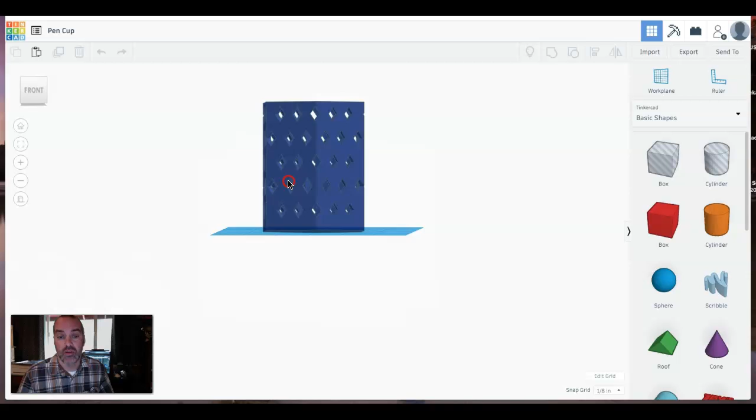You know, the thing that you put on your desk and put your pens in. You can see it on the screen right here, kind of a cool little pen cup. It's an octagon with a bunch of cool diamonds cut out of it, and there's also a solid base so when you pick it up your pens don't all fall apart.

We're designing this thing with the 3D printer in mind, so you can see the wrench from our previous video, all this stuff, in a couple clicks we send it off to the 3D printer. So this will be a cool plastic pen cup when we're all done with it.

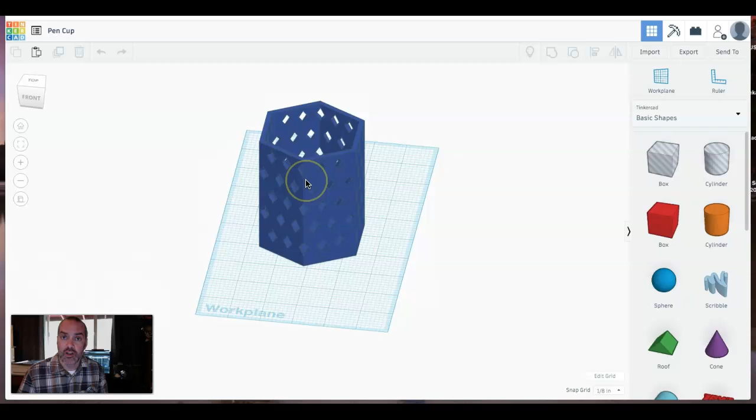To get started, I'm going to open up a fresh file here. You've got a chance to look at our finished product, but it's kind of big, so it'll be better if I just have a fresh file for you. I'm going to click up next to the TinkerCAD logo where it says Recent Designs, or you can also click New Design, and I'll have a fresh work plane all set up for me.

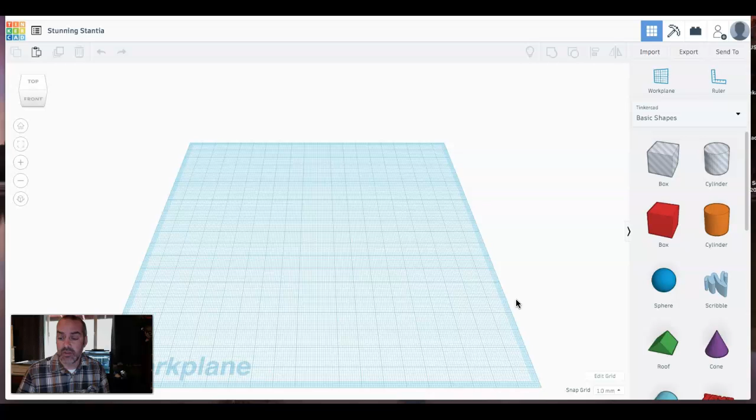Let's do a quick change from our previous work. Instead of working in millimeters, let's switch this over to inches, just a little more comfortable for most of us I assume. Down in the lower right hand corner it says Edit Grid. I'm going to click on that, and you can see I can change my units, going from millimeters to inches.

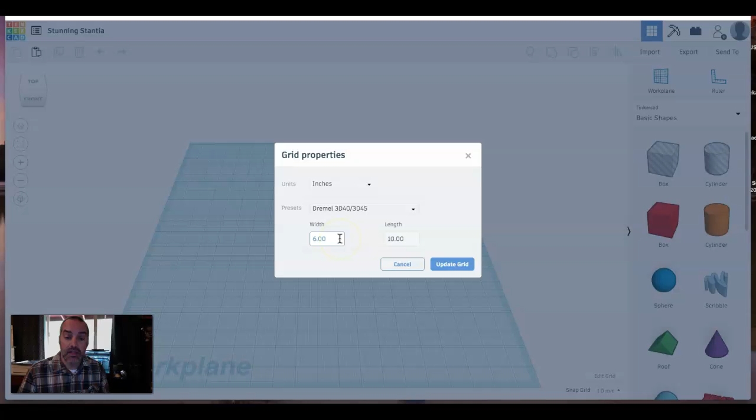Another nice thing to change here is where it says presets, default - this is the size of the work plane. If I click on that, there are a couple options for different 3D printers. The one in the shop is a Dremel 3D45. I'll click on that, and it automatically makes the length and width 6 inches and 10 inches. When I say update grid, you can see our work plane has changed to more of a long rectangle. This is the build space for the Dremel 3D printer we have, so it kind of keeps you within the bounds of what you can pull off with the machine. If you're doing stuff that's bigger than this work plane, well, you can't 3D print it.

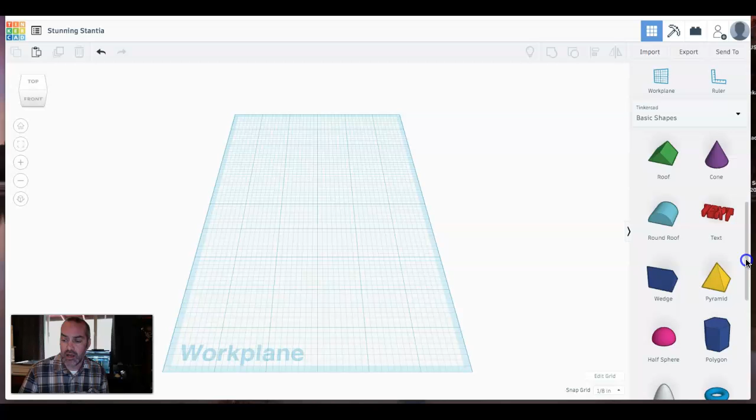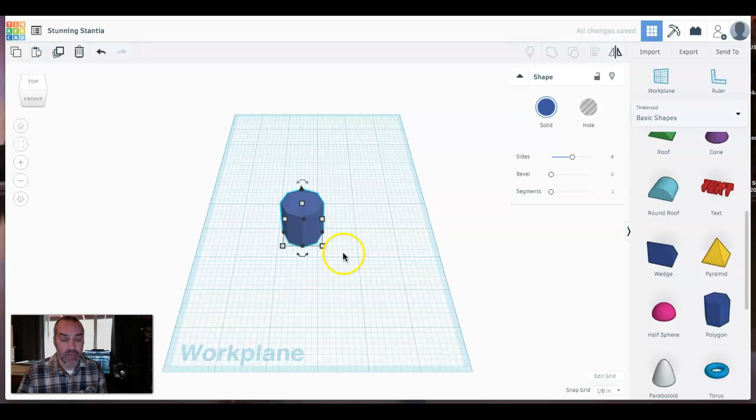To get started on our pen cup, we're going to bring in a couple of basic shapes. I'll come over to the basic shape pull-down menu and find a polygon, click on it, and bring it in. Now you can play around with exactly what size and shape you use for this. I'm going to start off with a polygon, and instead of 6 sides, I'll come over to the slider and crank it up to 8 sides, so it's now an octagon. As I orbit around, you can see I've got a little 8-sided polygon shape here.

I think it's probably about 1 inch by 1 inch by 1 inch. I need it to be a lot bigger than that to hold my pens. I love doing this type of stuff with a tape measure in hand, and I'll grab a pencil or pen and just see how big a full-size pencil is going to be. This one's reading 7.5 inches right now, so I need to make sure my cup can hold something that large. I also don't want it to be too big on my desk, so I love having a tape measure handy just to visually see how big these things are going to be.

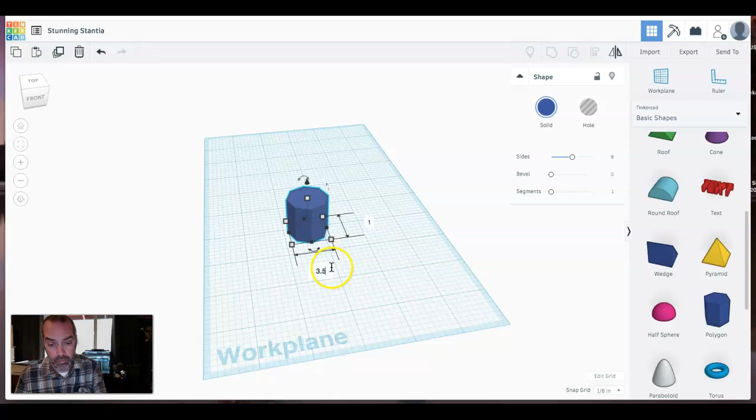I've done some thinking on it, and I think I want this thing to be 3.5 inches in diameter and 4 inches high. To change those numbers, I'm going to click on the little gray square there, and when I click on it, it turns red, and these number fields stay open for me to type in some numbers. I'm going to do 3.5, then click on the other one and do 3.5 as well. So now I have a 3.5 by 3.5 octagon.

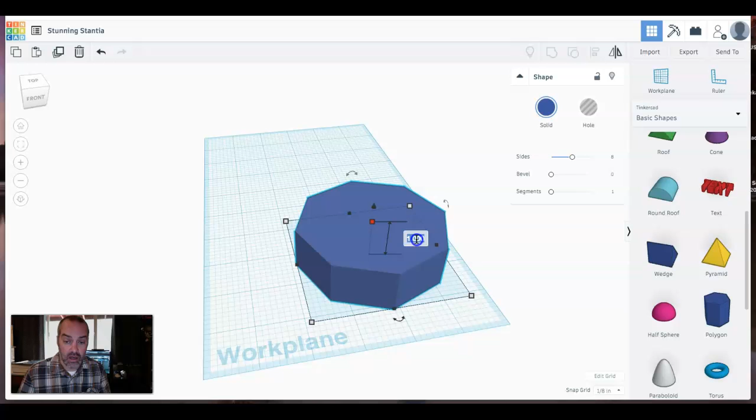Then, to make it a little bit taller, I'm going to click on that gray handlebar that's kind of coming up from the top of my shape. It's 1 inch right now, and I'm going to change that to 4 inches. So I have a good size octagon that's going to be the outside of my pen cup.

Next step, I need to make another shape just like this, but just a little bit smaller, and that one is going to be the hole.

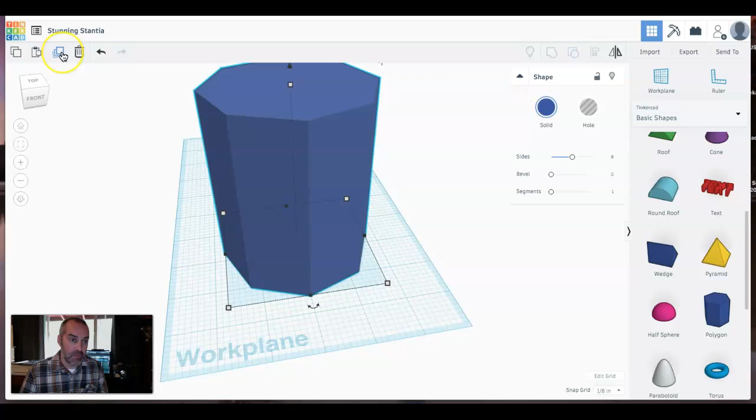It's going to be the part that cuts out the inside of this shape, so it turns it into a cup. To do that, I'm going to use the duplicate command, so you can copy stuff. A lot of what we'll be doing today is duplicating. When I click this button, it has made a second object. I can't see it right now because it's right on top of the first object, but I know it's there.

I'm going to take this second object and drag it up just a little bit, and as far as I drag that up, that will be the bottom of my cup. So I'm going to grab, not the little gray handlebar this time, that's going to actually change the shape of the object. I want to grab the little black cone that's up above it, so I won't change the shape at all, I'll just be dragging that second shape straight up.

So I'm going to click on that, and as I start pulling it up, you can see there's a few numbers popping up here. This is how high I've pulled it up. This is also going to be how thick the floor of my pen cup is going to be, the base of that pen cup. Right now it's at 1/4 of an inch. I think I'll bring that up, let's go for 3/8 of an inch.

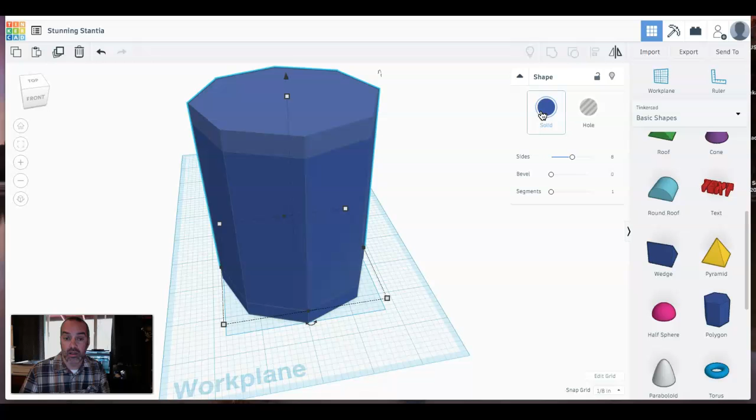You can see now it's a little bit easier to see that there's two shapes here. Just to make it even easier to see, I'm going to come over to where it says solid, and there's a blue color right now, and I'll just change that color so we can see it pretty easy. I'll just change it to red. So you can see I have this red shape inside of the blue shape, but I need to make this red one just a little bit smaller because I need to leave a wall for my pen cup.

So I'm going to click on the red, make sure I got that one selected, and then when I come down and click on the gray handlebar there, I get the two numbers for the length and the width. It was originally 3.5 and 3.5. I think I'm just going to change that to 3 and 3. Alright, so now you can see that I have a slightly smaller red shape inside of this blue shape.

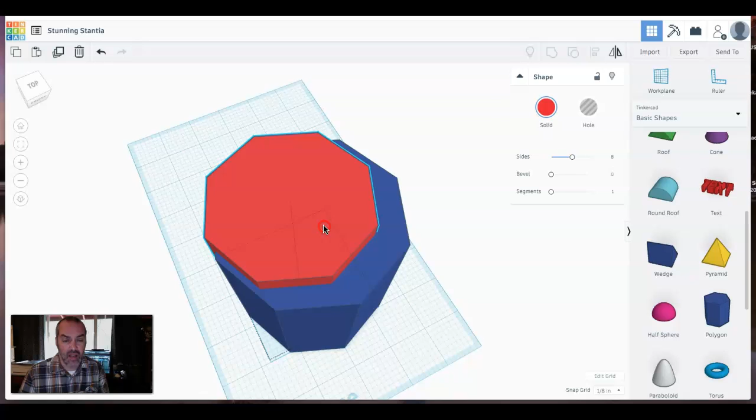But if I orbit around, you can tell they're not lining up properly at all. So I'm going to use the Align tool. I have the red one selected, I can tell there's kind of a little blue aura around it, and I'm going to hold down Shift and click on the blue shape. So now I have the red and the blue shape selected.

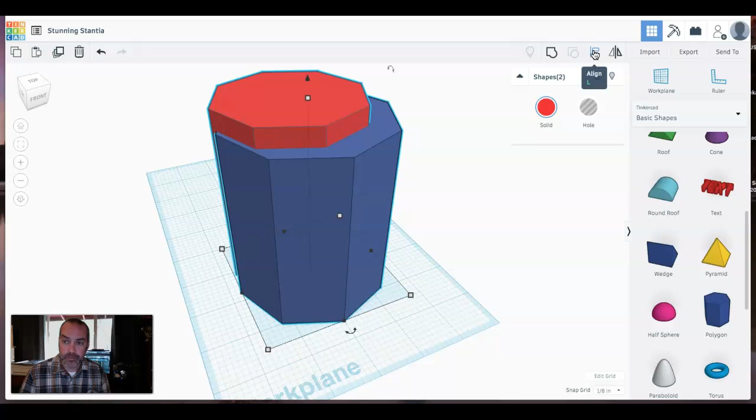And when I come up to the Align command and click on that, I get those little black handlebars. When I click on one of them, it'll align it on the x-axis, and when I click on the other one, it'll align it on the y-axis. I don't want to do that on the z-axis, I've already got those positioned just the way I want them. But the x and the y are now good, and as I orbit around, you can see it is perfectly in the center.

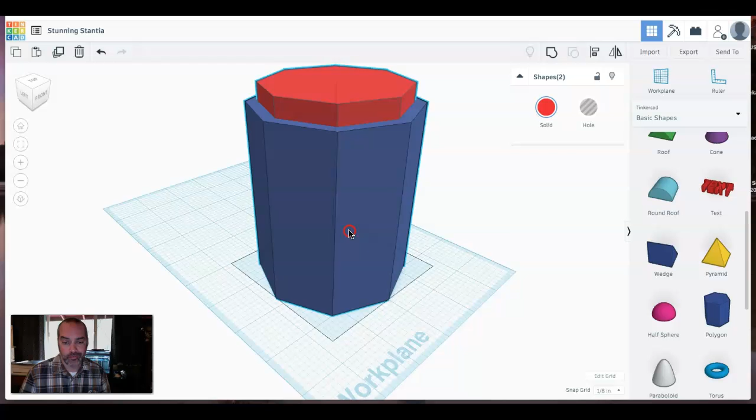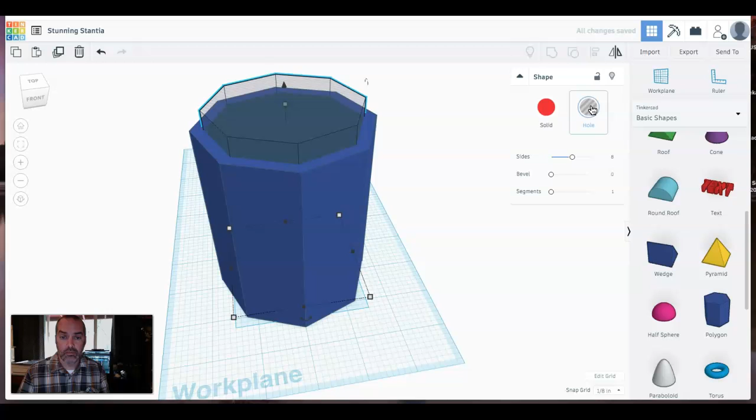Alright, time to make my cup. I'm going to make sure I have them both selected. I can tell I do because there's that little blue outline on all the shapes. Oh wait, I got to change the red one into a hole first. So let me click off, so nothing was selected. Now I click on the red one, and I'm going to change that into a hole. Now when I have them both selected, by holding down Shift and clicking on them both, and when I group them, I've now cut out a big hole in my shape, and I have my cup.

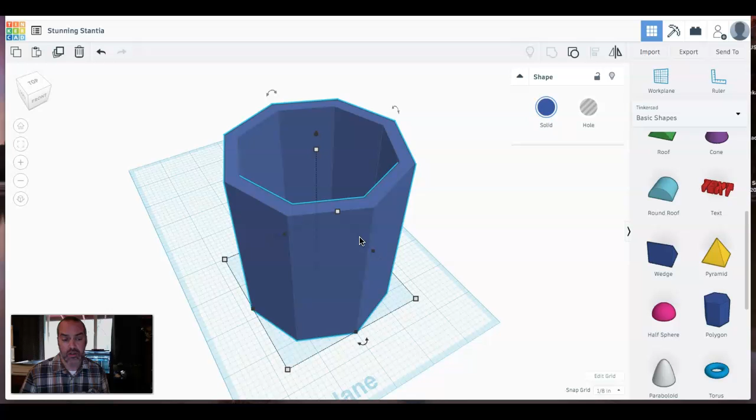Alright, I could send this to the printer right now, and if I actually printed it on a very thin layer, this thing would hold water. It could be a true cup, but I'm not looking for a water holding cup. I'm looking for a pen cup, and it's going to be a lot cooler if there's some little cutouts in there. So right now I'm going to just pull this off to the side, get it out of here for a second, and I'm going to make a shape that I will end up inserting over and over again into this cup, and it'll be used as a cutter to cut out the little diamonds.

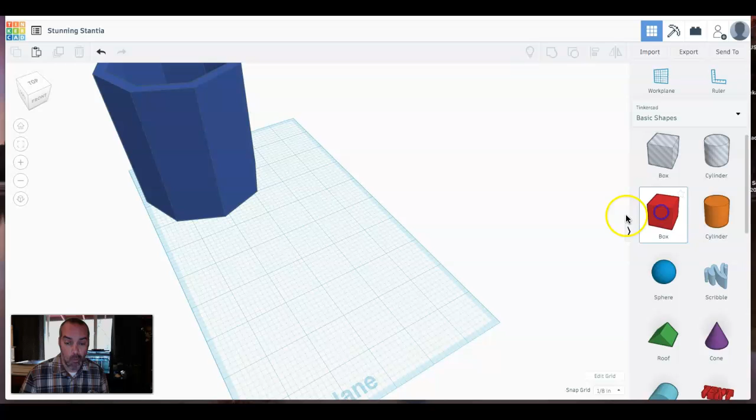So I'm going to start with just a simple cube, or a box. I'm going to click on the box shape and bring it in. Now I like doing this one from straight up above, so I'm going to click on the top command on the view cube, so I can kind of see that I'm looking at it from straight up and down. And now I'm going to rotate it. I'm trying to make a little diamond, so I'm going to rotate it 45 degrees, so I'll hit the little rotate button.

And I can type in 45 degrees. Alright, so it's starting to look like a diamond. I think it would be better if I squashed it a little bit, so I'm going to grab one of these sides and kind of squash it down. You could play around with the shape and do what you want, but I like the diamond.

Instead of just grabbing it and moving it, I'll type in some numbers here. How about 1/2 inch, so 0.5 in that direction, and then in this direction, how about 0.75. Alright, I like it, that's a good looking diamond.

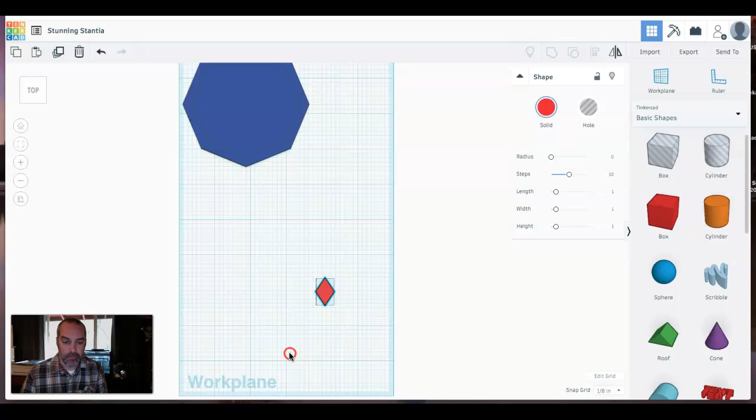As I orbit around here, you can see what I got. Now this is going to be a lot easier if this thing is rotated and laying flat on the work plane. So to do that, I am going to grab the rotation tool, and make sure you grab the right one. There's 3 different ways I can rotate this thing, and I want it laying flat on the work plane.

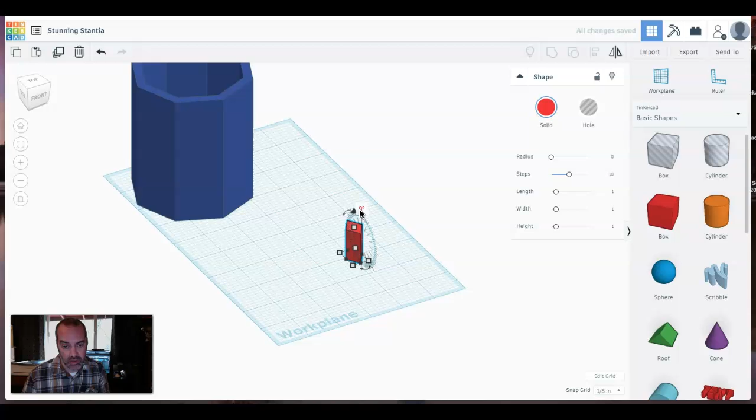So I'm going to make sure I grab the right one, and I will type in 90 degrees. There you go, you can see it's a nice little diamond shape.

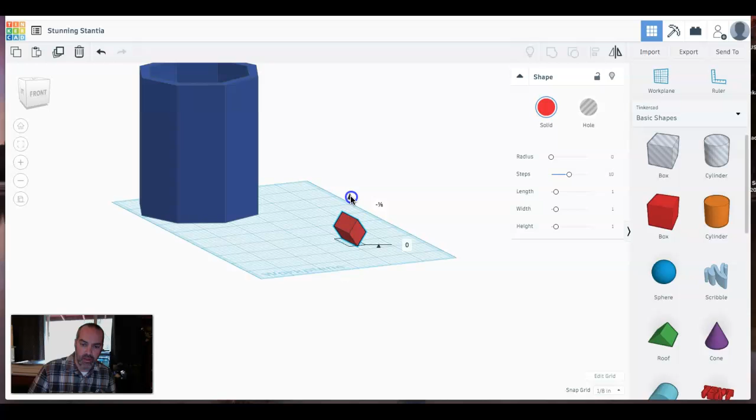I think I do want this one all the way down on the work plane itself. You see how it's kind of hovering right now? So I'm going to just bring it down, and when you start bringing it down, you can see the lower number on the lower right there - when it says 0, that means you're at 0, you're on the work plane itself.

Okay, diamond's looking great, but it's a little small. I need to stretch it out now, so I will click on it. And the dimension that is right now 1 inch, I need to make that a lot bigger.

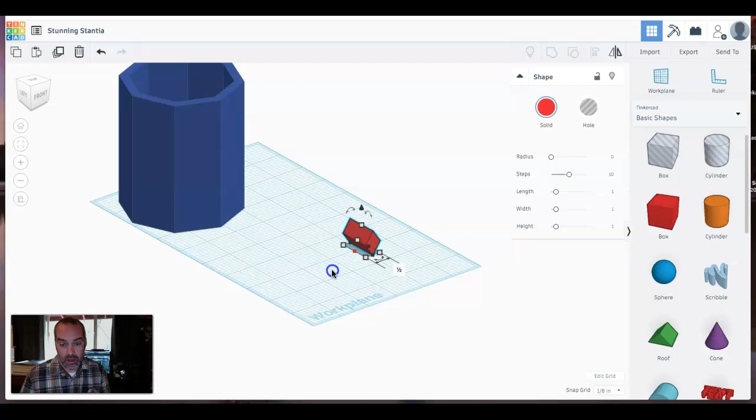There we go. And I think I'll type in something like 7 or so, so it's going to be 7 inches. That's what I'm looking for.

If this is a little confusing why we're doing it like this, just hang with me for a minute and it'll all come together in a second here. Alright, so now I have one big, long, diamond-shaped rod. I need to put a bunch of them together.

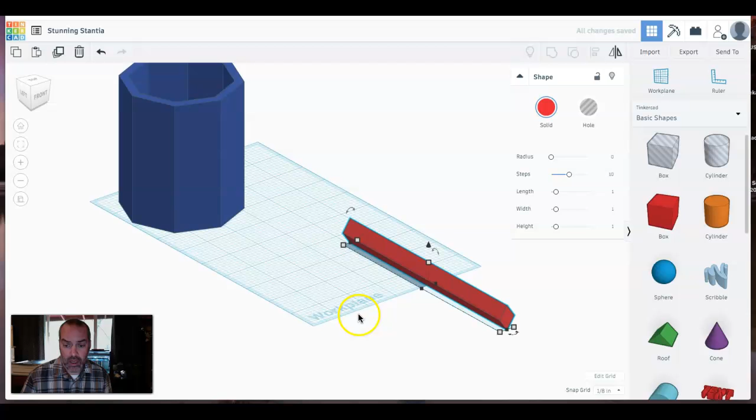I'm going to do that by duplicating. So I have my big diamond-shaped rod selected. I'll come up here to duplicate - I could also hit Control-D, notice that's the shortcut there. And so now I've duplicated that shape. Remember there's 2 of them, you just can't tell because they're sitting right on top of each other.

I'm going to grab one of them and rotate it 90 degrees. So I'll click on the little rotate arrow, click in the number field, and rotate 90 degrees.

Alright, and then I'm going to duplicate that one. So I have it selected, I'm going to hit duplicate. And remember, there's 2 of them on there now. Now I just need to rotate this one, and this rotation is going to be half of 90 degrees, which is 45.

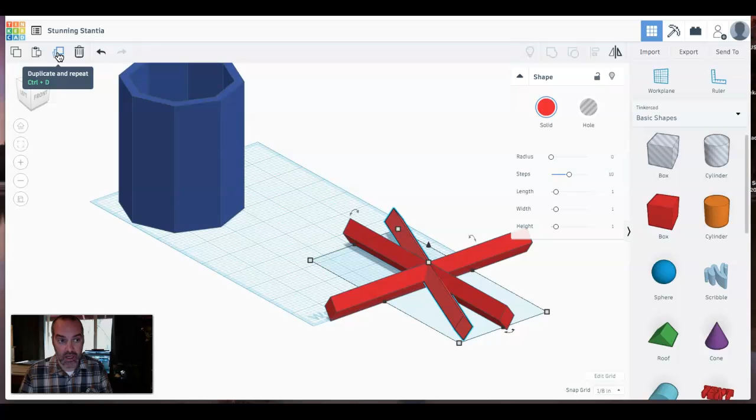All right, excellent. Now I'm going to just keep doing that until I have a nice little fan array of these diamond rods. So I'm going to select the one I just did and say duplicate, and then I'm going to rotate it 22.5 degrees.

I'm going to do that one more time. Duplicate, rotate, 22.5 degrees. Actually, I guess I got to keep going to get the whole array.

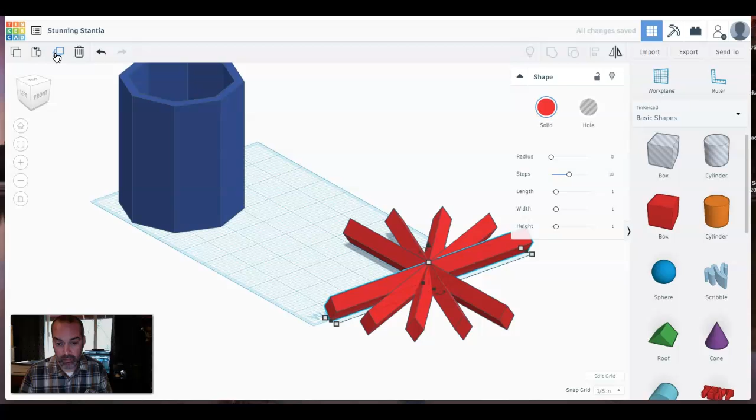And then a cool trick that works most of the time, if you've done something a couple of times like I was duplicating and rotating - this duplicate and repeat command, if the computer can pick up on it, it'll actually keep repeating a couple steps over and over. So I didn't have to keep doing the rotate. Once I did it once or twice, it kind of realized there was a pattern there, and then hitting duplicate and repeat, it just finished the pattern for me.

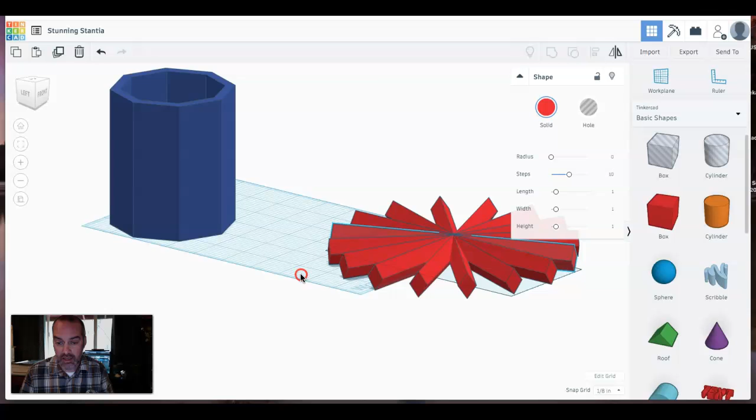All right, let's see if this thing looks the way I want it to. Perfect, got a nice little fan array of diamond rods. And then this is going to be the thing that's going to be my cutter. I'm going to make this a hole, and it's going to cut out the diamond pattern in our pen cup.

To make this a little easier on myself, I will select all these diamond rods and group them together. So now it's acting like one object, and then I'm going to change it over to a hole.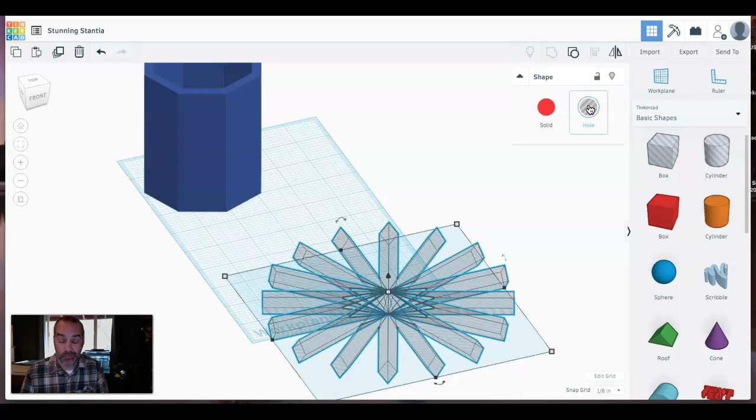Now I just need to get these things positioned and group them up, and I'll actually be done. To get them positioned perfectly, I will align them. So I'll select both my diamond rod array, and then I'll hold down Shift and select the pen cup, and I will hit the align command.

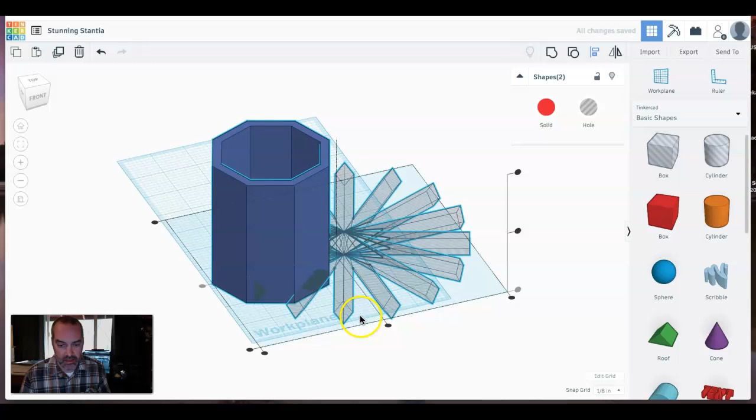And then the little black dots pop up, those little black handlebars. If I click on the X-axis, it aligns it on the X. If I click on the Y-axis, it aligns it on the Y. And now as I look around, my diamond cutouts are perfectly centered on my pen cup. But they're a little low.

Right now they would actually be cutting through my base, and I don't want that. So I'm going to make sure I only have my diamond rod array selected, and then I'm going to just raise that up. We had a 1/2 inch, or a 3/8 inch bottom, so I need to bring it up at least 3/8 of an inch.

But I think I want to come up just a little bit more, so it's not right on the base of the pen cup. So I think I'm going to come up a full 1/2 inch, and that will leave a little 1/8 inch buffer down there. All right, looking pretty good.

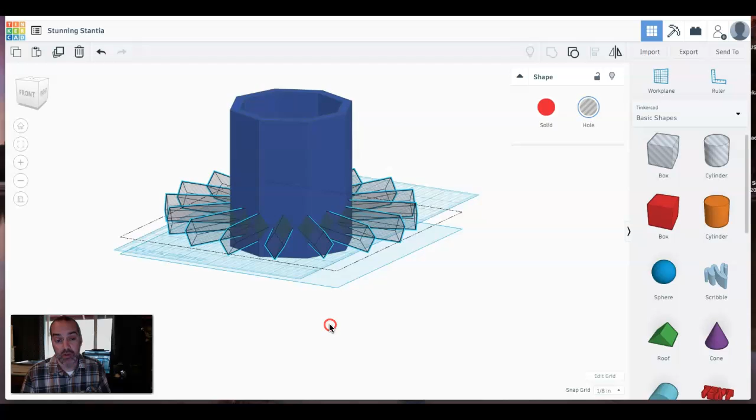Now I just need to repeat that a couple of times till I get to the top. So I will come up and hit duplicate, and then I'm going to bring it up. Now, how high do I need to bring it up? When I bring it up, it looks like 3/4 of an inch. The diamond tips are touching right on top of each other, and I want to have a little more space there. So I'm going to actually come up a full inch, like that.

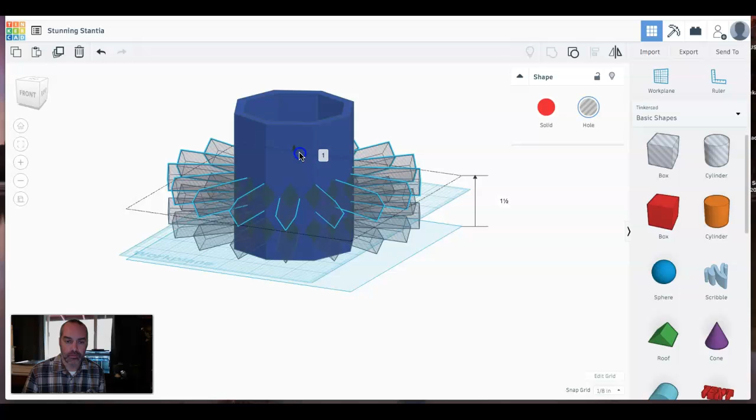Now, I could just leave it like this and do that same duplicate move a couple of times, and all my diamonds would be in a vertical line, which could be okay, but slightly cooler, I think I might rotate each one of these layers as I go along just to stagger the pattern a little bit.

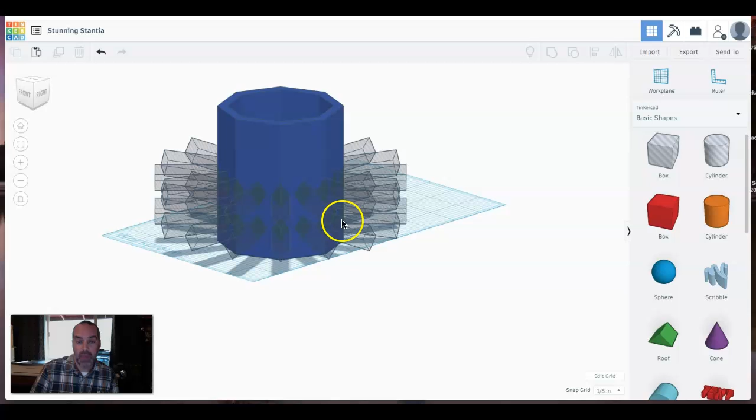So I'm going to click on the highest layer right now, the one that I just did, and I'm going to rotate it. And how much should I rotate? You could kind of be creative here and decide on your own. I think I'm going to go for 12 degrees. So now it's just staggered just a little bit.

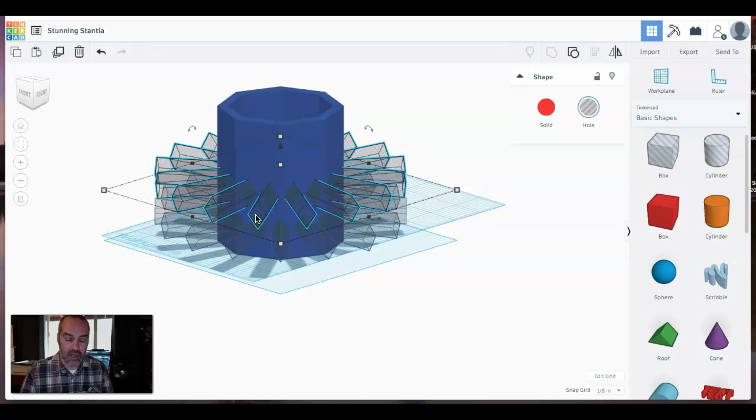Okay, do that again. I'm going to click on that top layer of diamond rods. I'm going to bring it up a full inch. Oops, I forgot to hit duplicate. So I'm going to hit undo, and then duplicate, and bring it up a full inch.

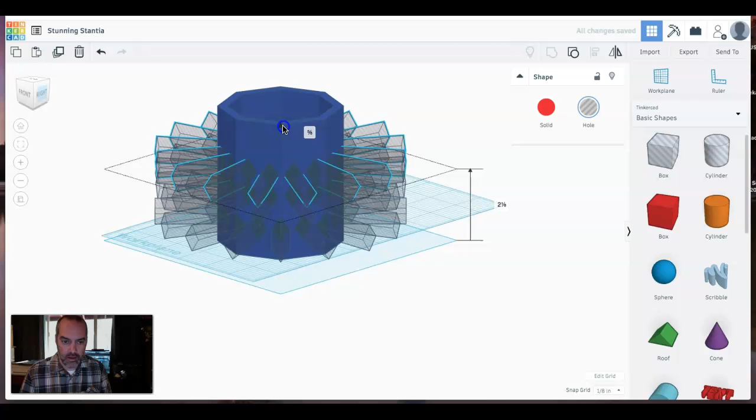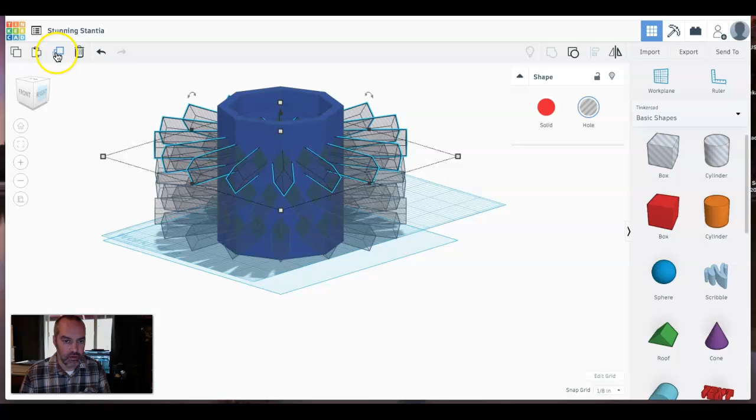Click on the curvy arrow that allows me to rotate it, and I will rotate that one another 12 degrees as well. And then one more time. I have that top layer selected, duplicate, bring it up.

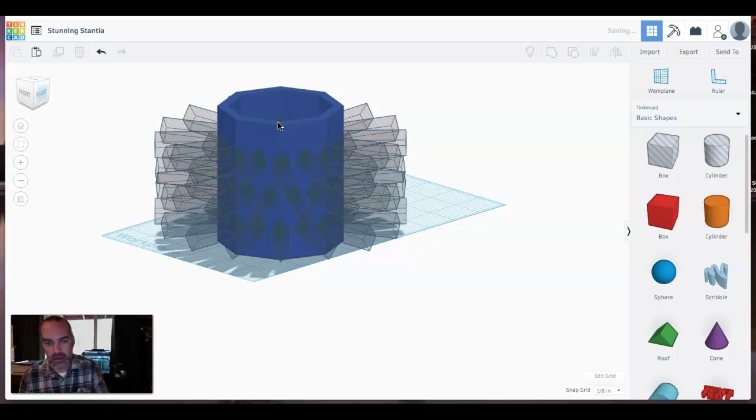Now, if I were to do it like this, I would actually be poking out the top of my cup, and the top wouldn't be all sealed up, and I don't want to do that. So actually, I think I will evaluate what this looks like. And I think it looks pretty cool.

I'll just stop at 3 layers, but what might make it look even a little cooler, I'll bring all 3 layers up just a little bit more. Center them in the cup vertically a little bit more.

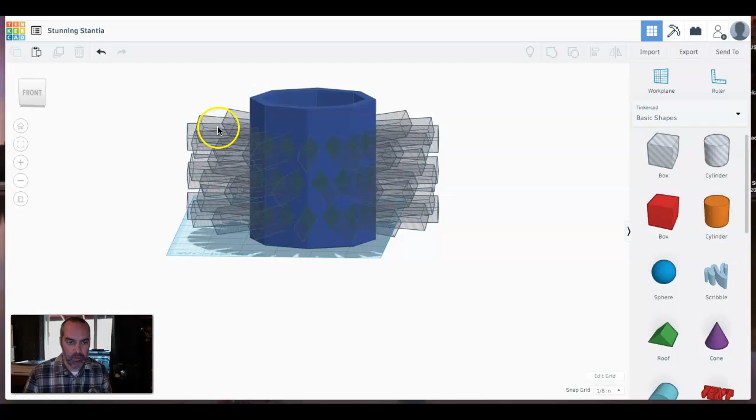So I am going to select all 3 layers while holding down the Shift key. And I'll just bring it up just a little bit. There. That's going to look cool.

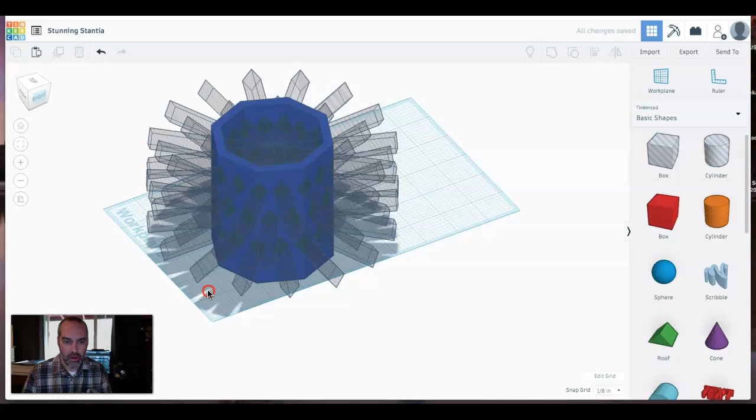Alright, I know it looks a little busy on the screen, but it's all going to come together now when I make sure I have everything selected. And I hit group. And those little diamond rods, remember those were actually the holes, and so they were cut into there. And wow, that looks pretty darn cool.

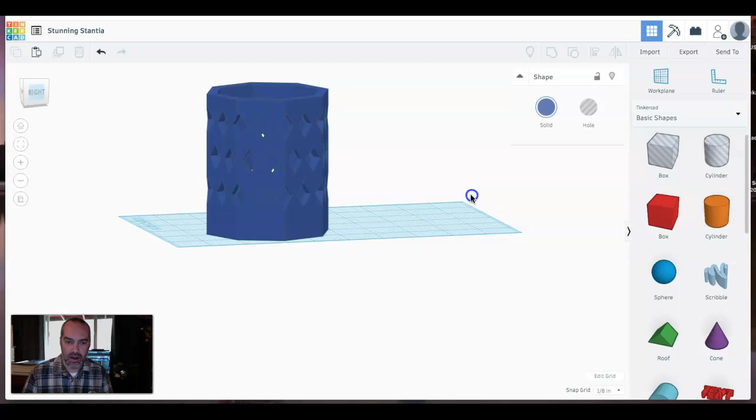Okay, there we go, pen cup. I'm going to make sure that I name my file so I can remember it. I'm going to call this one Pen Cup 2, because it's my second one.

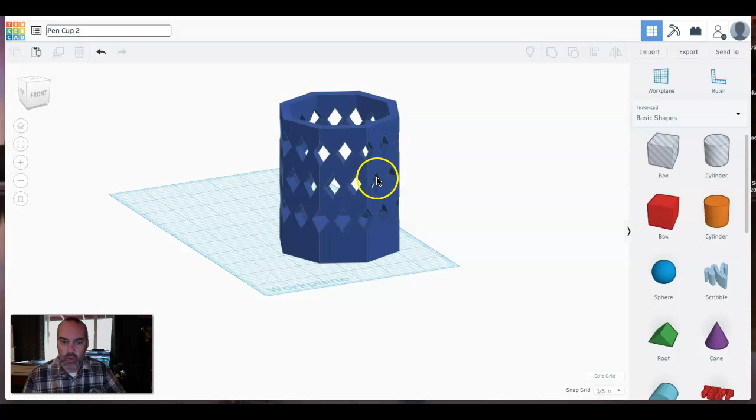Now, if I wanted to send this to the 3D printer, I would just say export, and export it as an STL file. All right, I hope that's going well for you. Please send me an email if you're having any troubles, and I will do my best to help you out. Take care.